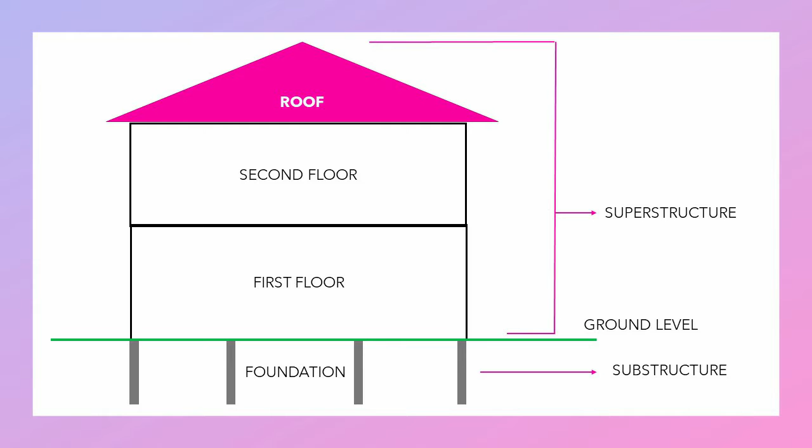Good day, students! Last sync meeting, natutunan natin kung anong importance and purpose ng foundation ng ating mga structures. Natutunan din natin kung paano gumawa ng foundation plan as part of our structural layout and details gamit ang AutoCAD.

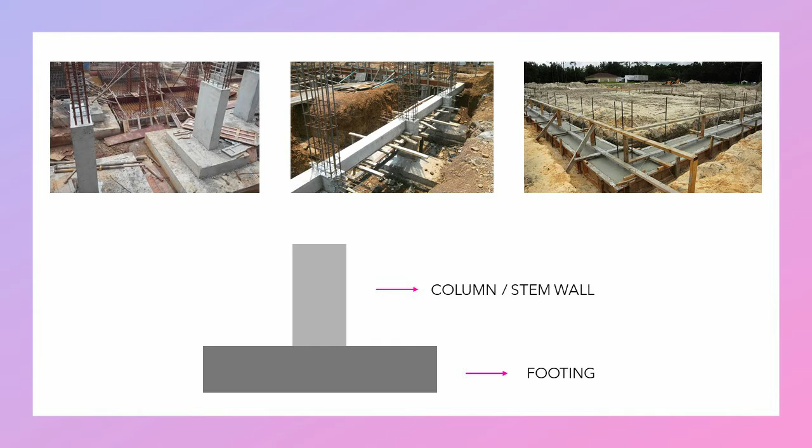Before we take a step ahead to part 2 of our structural layout and details, may additional feature lang akong gustong idagdag sa foundation plan natin. We will create grid lines based sa columns na ginawa natin. This is very important dahil dito magkakaroon ng label ang mga columns natin.

Okay, so we are here sa latest na ginawa natin, which is our foundation plan. We already designated our continuous footing and our columns as well. Now, para sa grid lines natin, let's use reference line layer and the reference bubble layer.

First, let's assign our reference lines. Using the line command, maglalagay tayo ng lines connecting the midpoints of our columns wherein dapat lahat ng columns natin ay magkakaroon ng intersection sa gitna. I-extend nyo lang yung reference lines nyo ng 2,000 mm outside the wall.

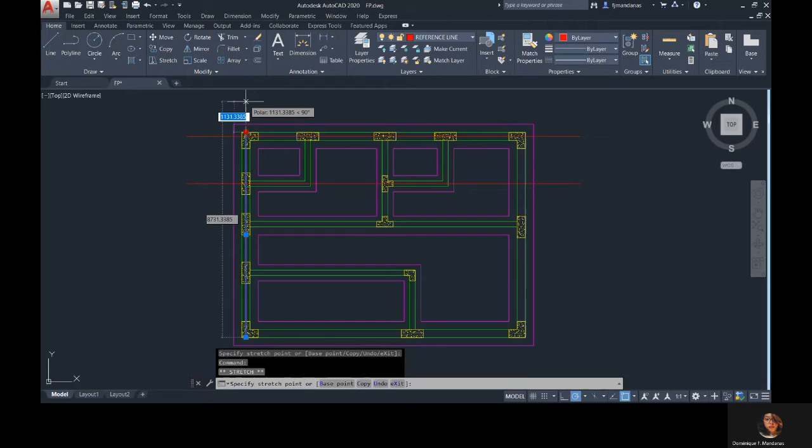This is a default, kaya kapag gagawa na rin kayo ng reference lines nyo, 2,000 mm din ang extension outside the exterior wall, specifically ang gagamitin nyo. You can repeat these steps lang then hanggang malagyan nyo lahat ng columns.

Or, we can use the X-line command. This is just an infinite line. Mas madali itong gamitin pag gumagawa tayo ng reference lines.

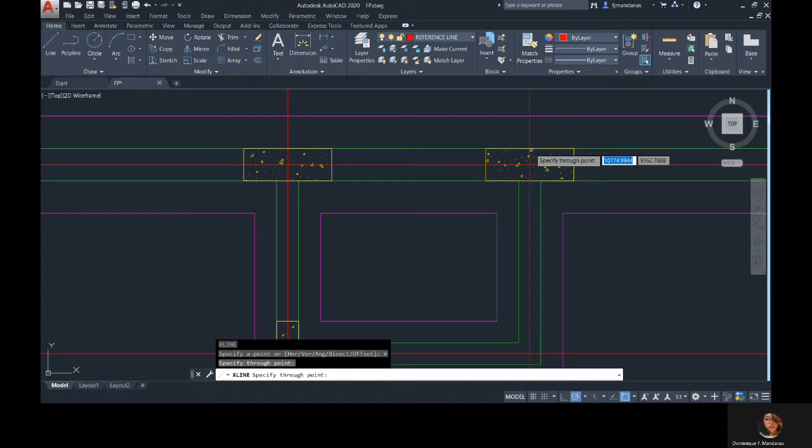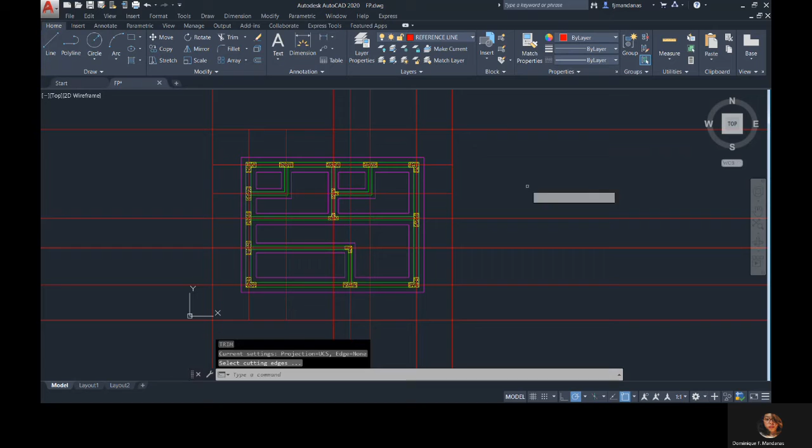And we can just use X-lines din na 2,000 mm ang distance from the wall, exterior wall, so that we can trim na lang yung mga sobra. Gawin nyo lang to all the columns, and then after that, don't forget to delete the extra X-lines we used for the trim command. Ayan, that is our reference lines.

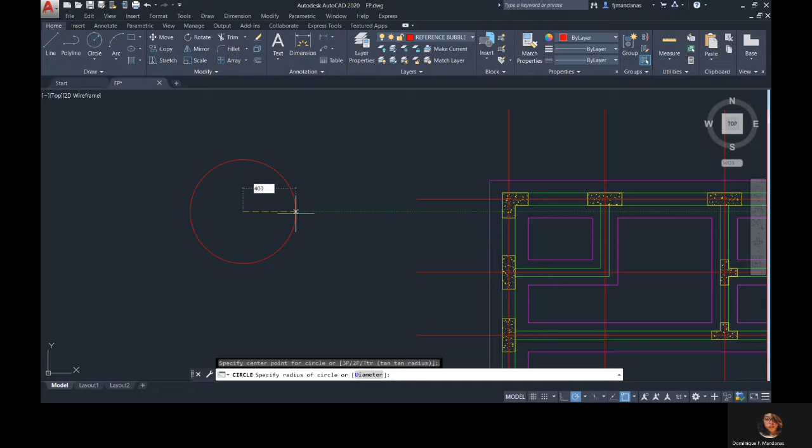Next, let's create the other part of our grid lines, which is the head. Punta tayo dito sa reference bubble layer. Gawa tayo ng circle with 400 mm na radius. After that, type T for the numbers and letters na ilalagay natin sa loob ng bubbles. Sa taas ay numbers and then sa left side naman are the letters. Gawin din nating 400 yung text height.

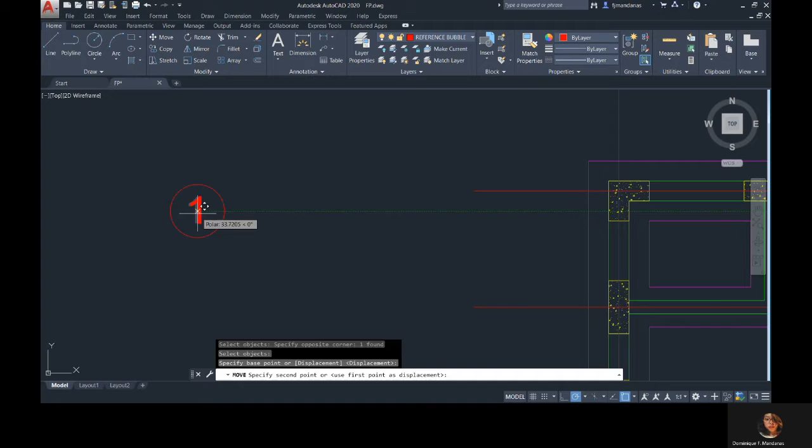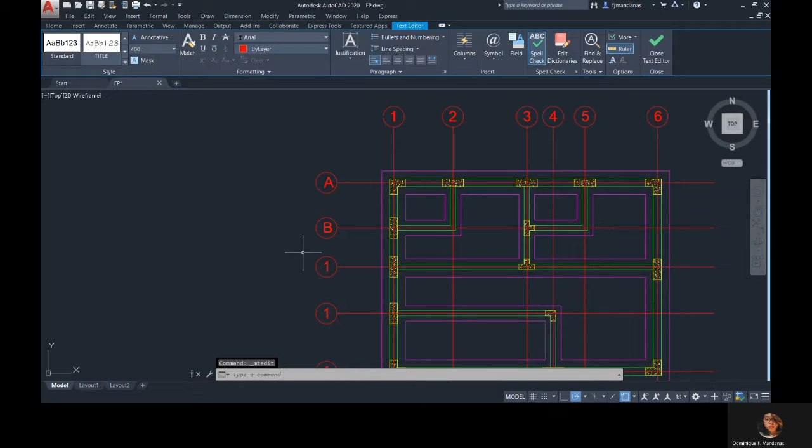After that, use the copy command para malagyan ng heads lahat ng reference lines sa top part and sa left. Make some necessary adjustments along the way, especially sa text sa loob ng ating mga bubbles. After that, we are really done sa ating foundation plan. As we can see, may mga pagkakakilanlan na ang ating mga columns like this one. This is the A1 column.

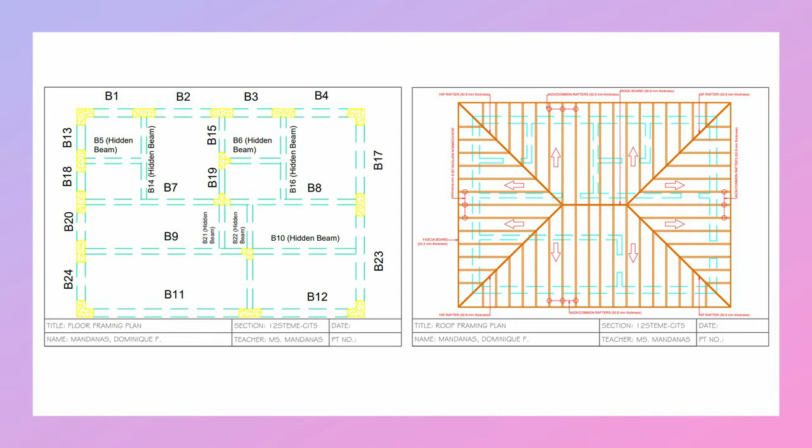Okay, so now we can proceed with part 2 of our structural layout and details, which are the floor framing plan and the roof framing plan. Let's start with the floor framing plan.

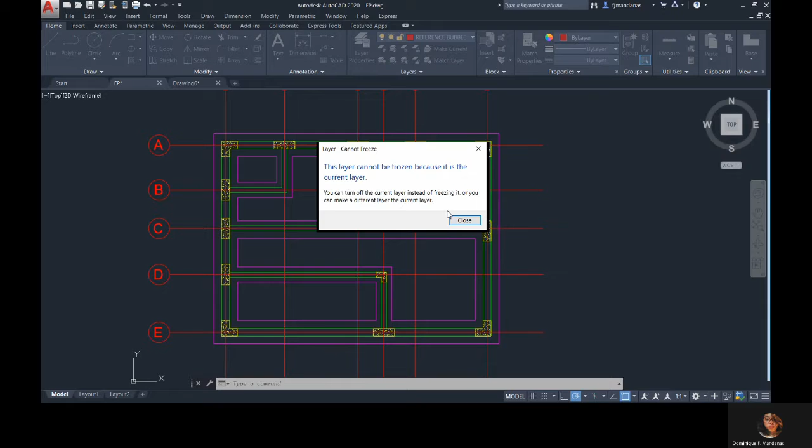Mag-open ako ng new file. Dito natin gagawin yung floor framing plan natin. Ano ba yung mga kailangan natin para dito? So for us to create floor framing plan, we specifically need our columns. Ibig sabihin, bago ka makapag-create ng floor framing plan, which is yung ganito, we have to create muna our foundation plan first. So, okay na tayo sa part na yon.

Let's copy the foundation plan na ginawa natin dito sa new file. After that, i-freeze natin yung lahat ng layers except sa layer ng column and yung hidden line layer which is yung reference ng wall natin na walang butas. Yun lang dalawang yun yung gagamitin natin. The rest ay dapat naka-freeze.

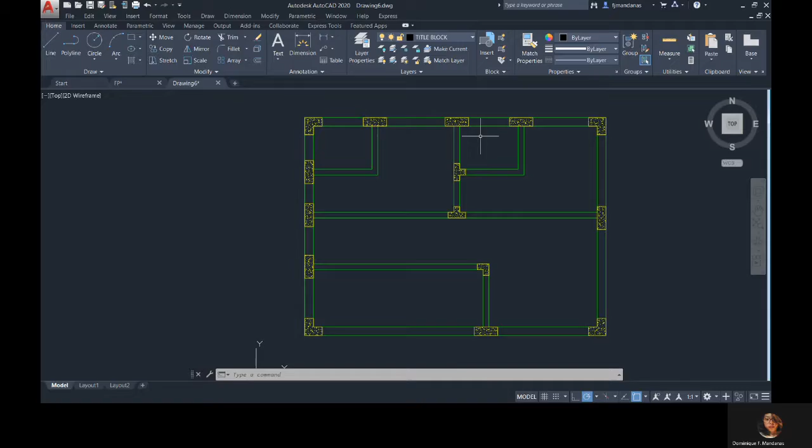So the composition of our floor framing plan is the beam. Beam is the direct support of the floor load of a building. It transfers this load to the adjacent columns. So with that definition, makikita na kaagad natin yung connection ng beam and columns.

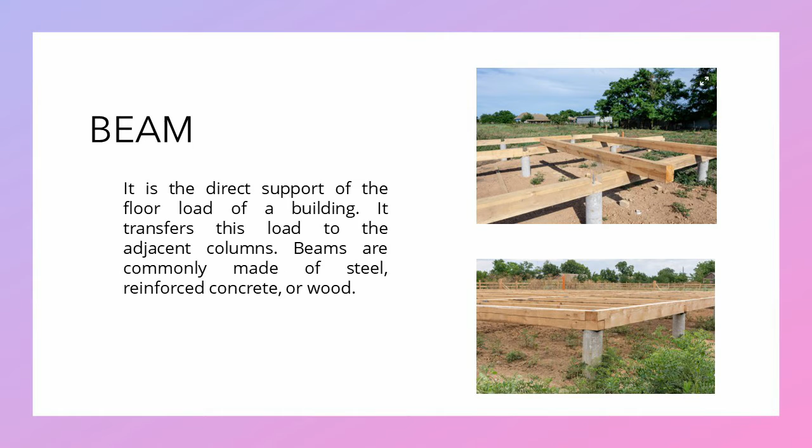On the right side, we can see ang ilan sa mga examples ng floor frame natin. So it has beams na connected sa mga columns na concrete. Putting our design in real life, ganito yung magiging itsura. Itong beams natin are gonna be the support of our flooring.

So, create tayo ng separate layer for the beam. Color is 112, line type, hidden 2 times, and line weight is 0.5 millimeters.

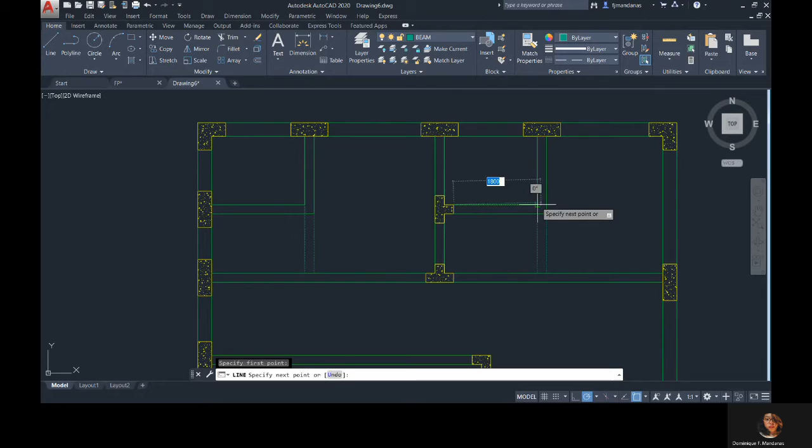Okay, after that, let's use line command to create our beams. We need to place our beams from column to column or from column to beam. If we encounter column to beam, we will call that a hidden beam. Lagay lang tayo ng beams natin sa mga parts na kailangan. No need to consider na yung mga dead loads natin dito since hindi naman ito ina-extend upward.

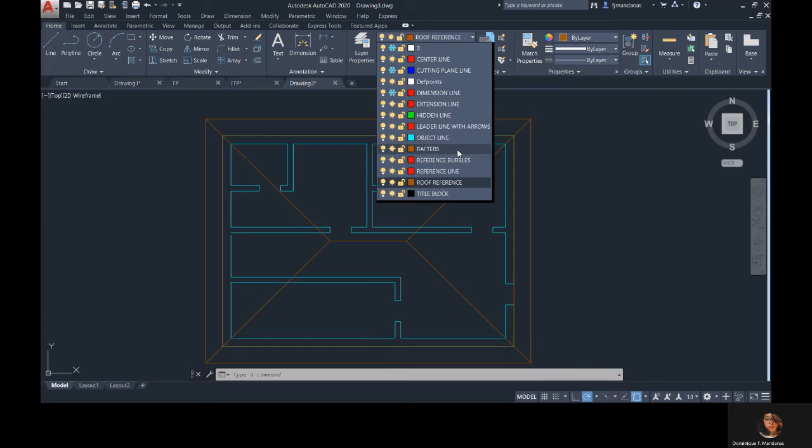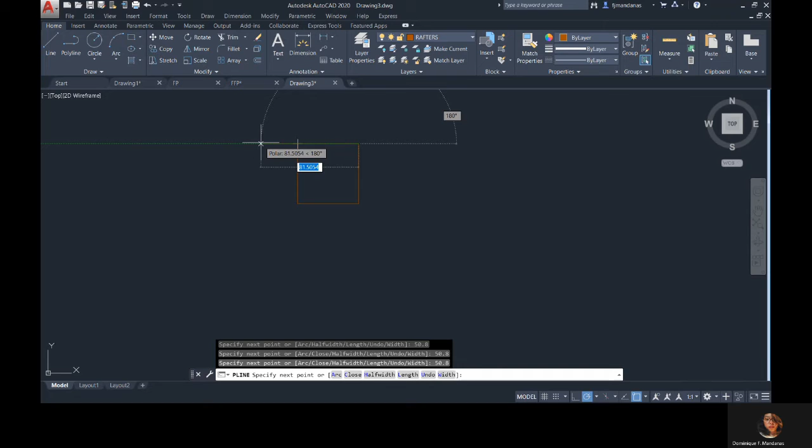Create tayo ng box gamit ang polyline command. Measurements natin ay 50.8 mm by 50.8 mm para sa rafters. Lagay tayo ng line sa gitna para mas madaling i-center yung box natin sa iba't ibang parts. I-delete din natin itong line after it served its purpose.

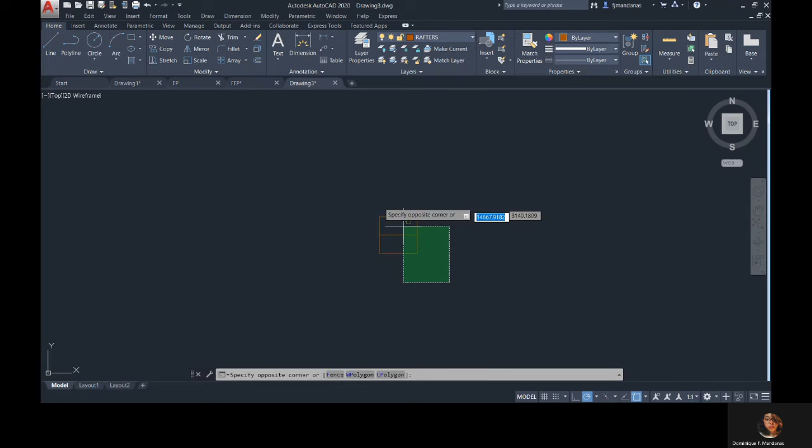Unahin natin yung ridge board. Let's copy itong box na ginawa natin. Midpoint ng line yung base point, tapos left click dito sa intersection. Extend mo yung box hanggang sa dulo ng ridge board reference line, then stretch for about 1 inch, or 25.4 millimeters. We are done sa ating ridge board.

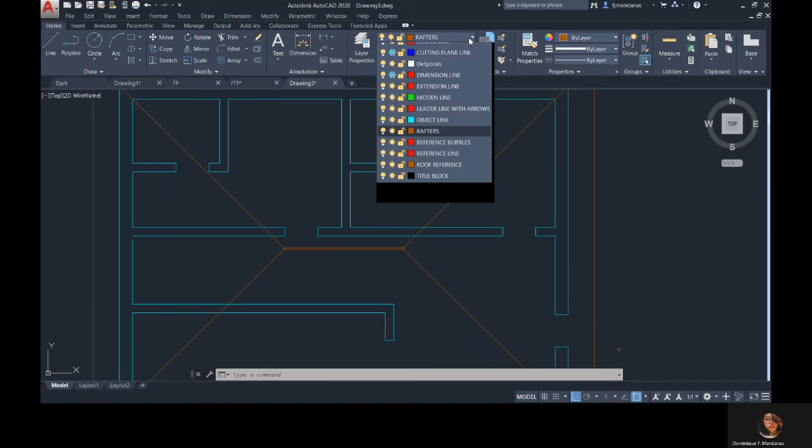Before we continue with the rafters, edit muna natin yung wall. Gawin nating hidden 2 times yung line type.

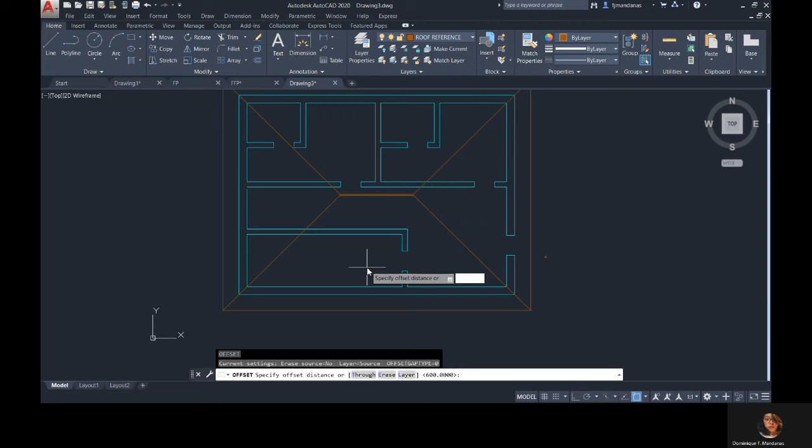Okay, let's create our fascia board gamit ang offset command. Offset the outer layer with an offset distance of 25.4 millimeters, and ang offset ay paloob towards the wall ang direction. Fascia board is done. Pagkatapos nun, gawin naman natin yung first hip rafters natin.

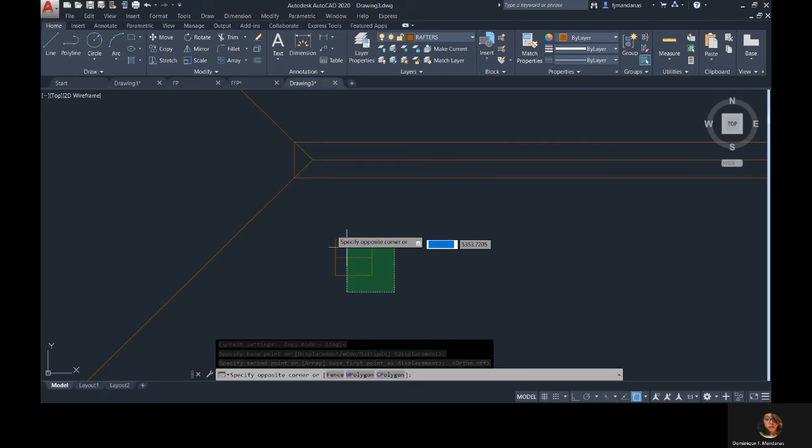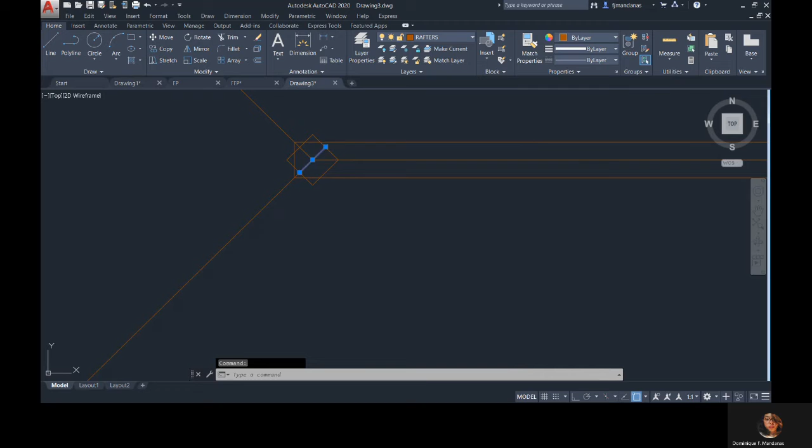Gamit yung box na ginawa natin kanina, i-copy mo yon, then rotate for about 45 degrees. Move it to the endpoint of the hip rafters over here. After that, extend mo yung box all the way here. Wag dito sa outer rectangle ha.

Dito sa offset for fascia board yung dulo. So that is our first hip rafters.

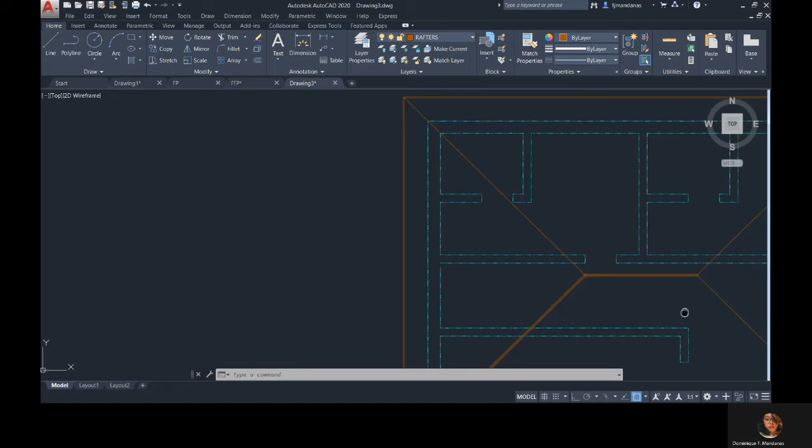Let's copy yung ginawa natin na box to create naman yung first common rafter natin. Move it dito sa dulo ng ridge board. Then extend hanggang dito sa fascia board. You can use ortho mode para talagang pantay yung extension.

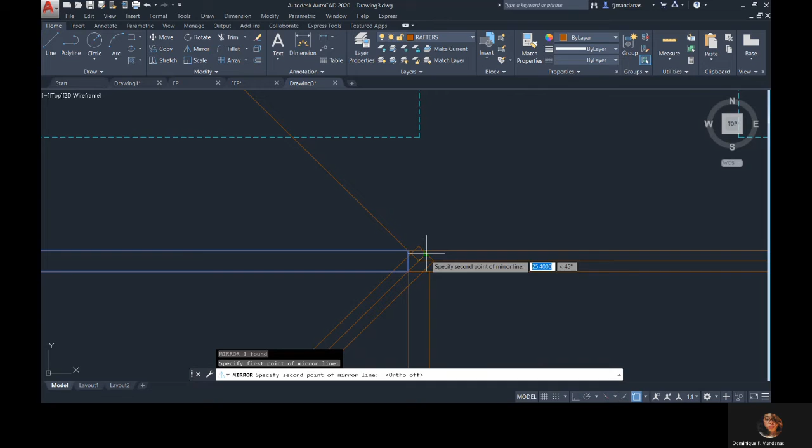I-mirror lang natin itong common rafter na ito dito sa baba. Let's modify itong hip rafter natin.

Tapat mo lang yung mouse mo dito. Then click Add Vertex, move the middle dito sa dulo na ito. Then stretch lang yung mga dulo doon sa intersection o snap sa common rafters. Ayan, we created the tip of our hip rafter. Do the same step sa kabilang dulo ng hip rafter.

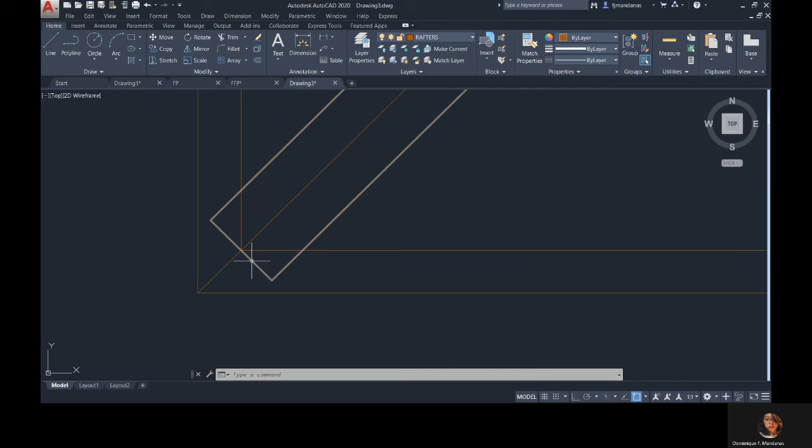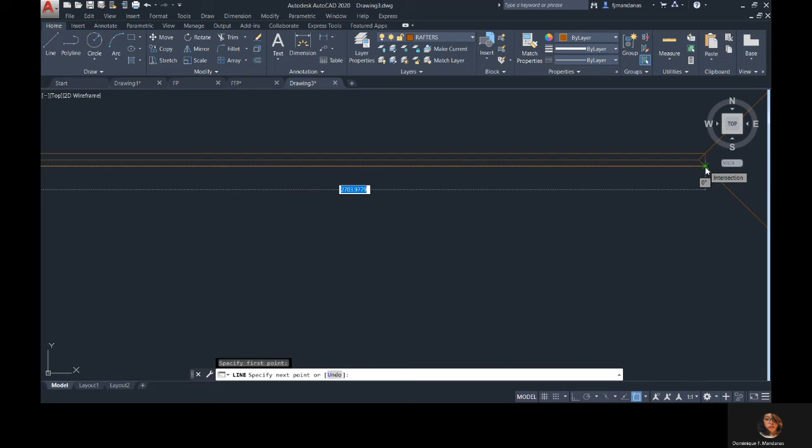After that, let's create the other common and jack rafters. Distance ng common and jack rafters natin, as we said earlier, is 20 inches or 508 millimeters. So let's create a reference line right here with 508 millimeters length.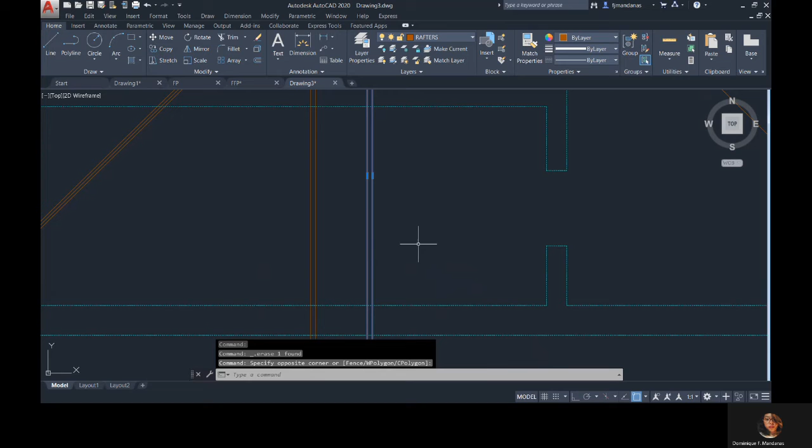Copy natin itong rafters na ito sa endpoint ng line na ginawa natin. Don't forget to delete that line after it served its purpose. Gawa pa tayo ng isa, same step lang din.

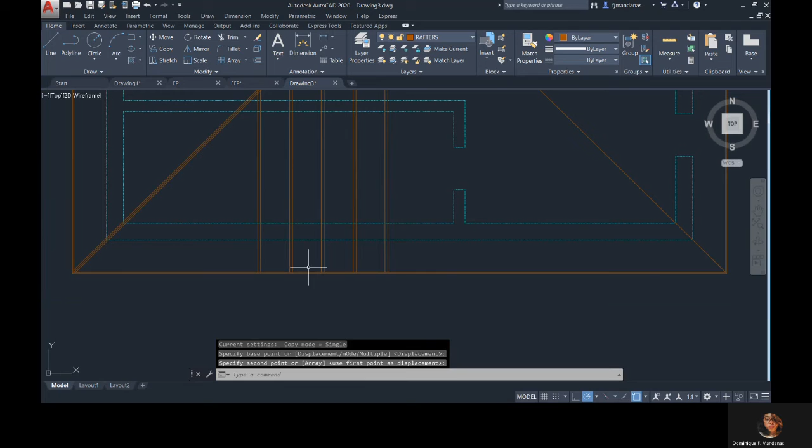After that, copy these two common rafters, at ang base point ay itong pangatlo. Then move it right here. Ulitin lang yung ganitong pag-copy hanggang sa dulo.

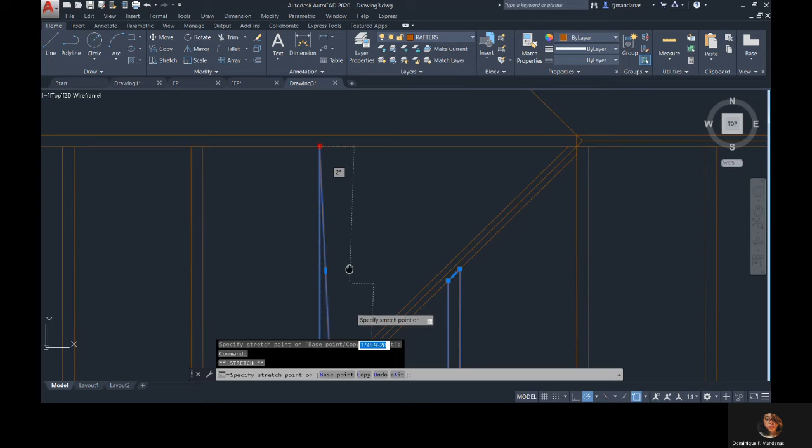Then itong mga nag-overlap sa hip rafter natin, stretch lang natin yung corners nila up to the intersection o snap sa hip rafter. Repeat the same steps to the remaining common rafters na nag-overlap sa hip rafters natin.

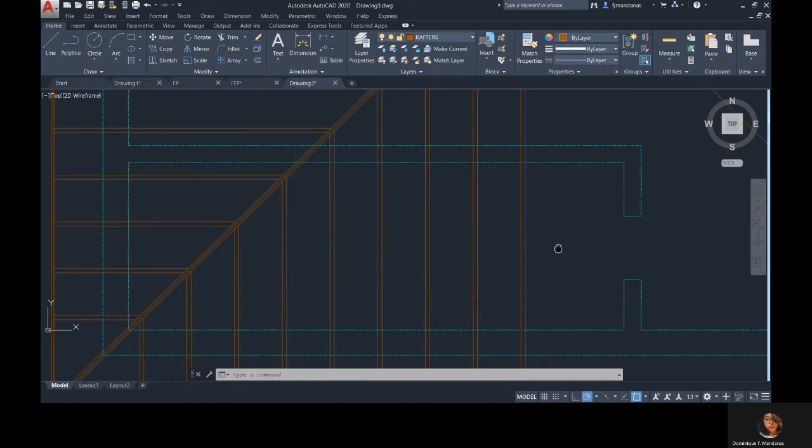After that, let's use mirror command para makreate yung jack rafters natin sa kabilang side sa taas. Let's mirror all of the rafters we've created dito naman sa right side. Make sure nakasama yung hip rafters. Then itong lahat naman ng ito, i-mirror natin upward.

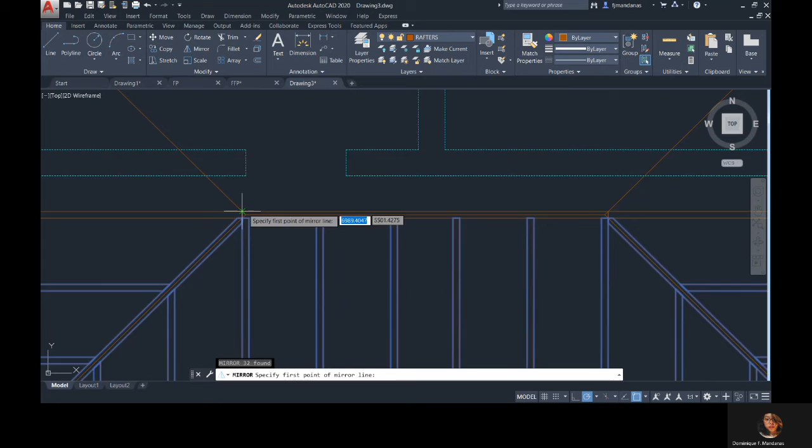We are done with the roof frames. Mag-add lang tayo ng mga labels. Let's use the leader line with arrows layer for the labels of the parts of our hip roof.

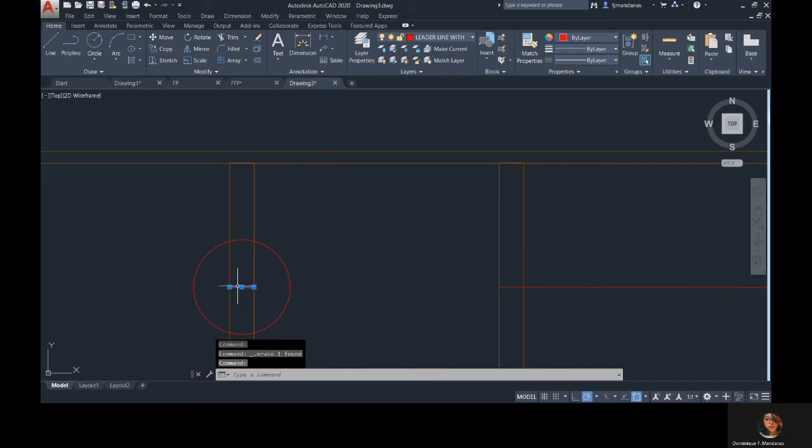Create tayo ng circle dito with 100 mm diameter, covering 3 jack and/or common rafters. Then connect the center of the first circle to the center of the third using line. Click on this leader line arrow, then type the label and the thickness of the jack and common rafters.

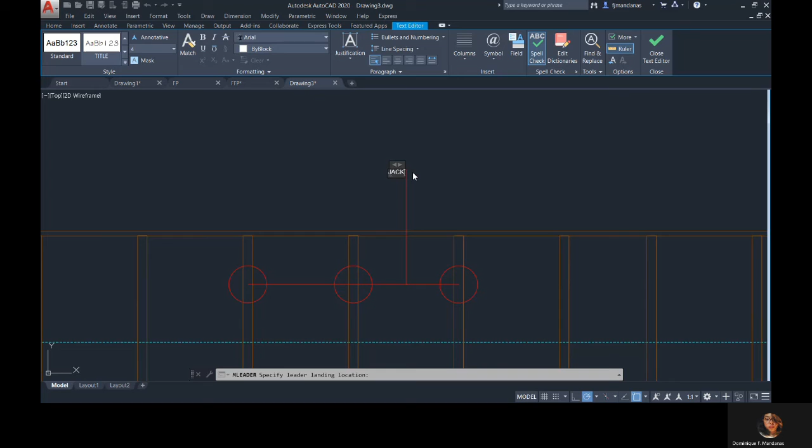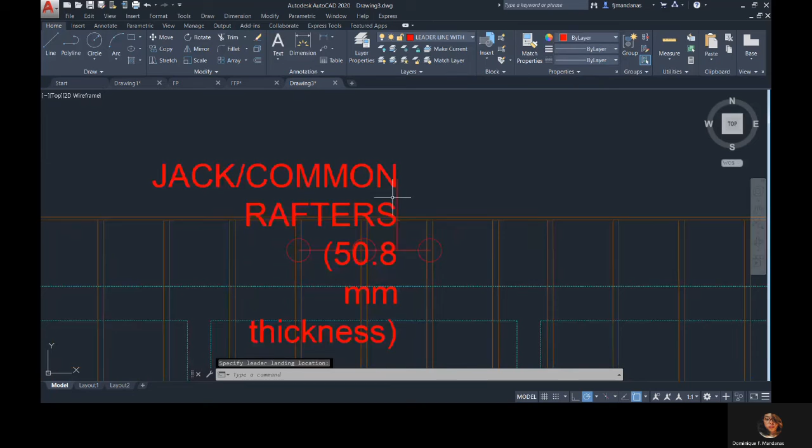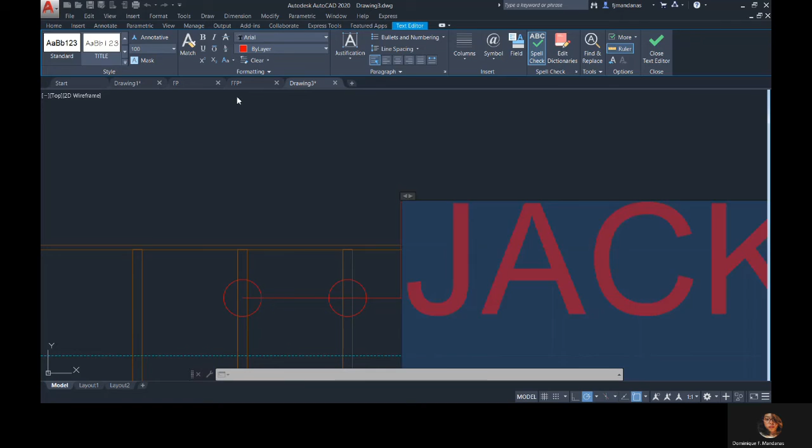Standard, text height of 100, arrowhead size is 100 din. So kung wala kayong choice dito sa arrowhead size, you can click this and check yung arrowhead size checkbox, so mag-a-appear na siya doon after nyong i-apply.

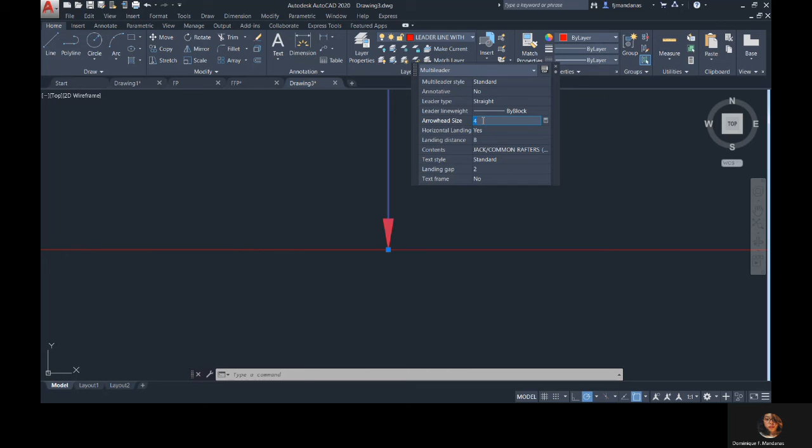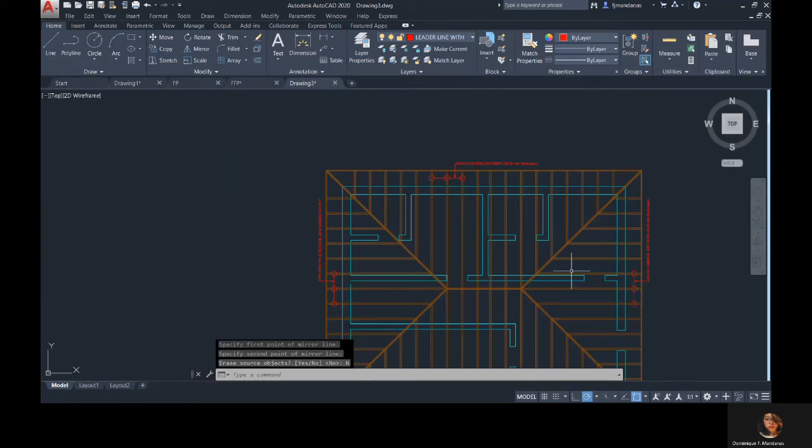And then after that, mirror lang lahat ng ito sa baba and sa dalawang gilid. After that, use leader line arrows then for the other parts. Then again, type the label and the thickness of the parts. Use the mirror command if necessary.

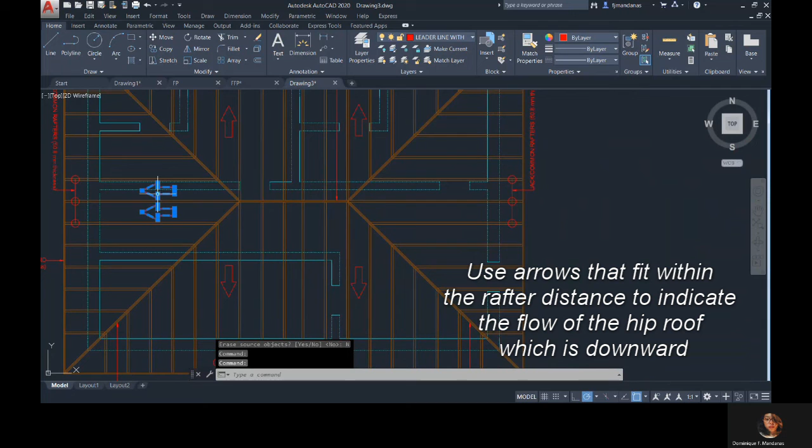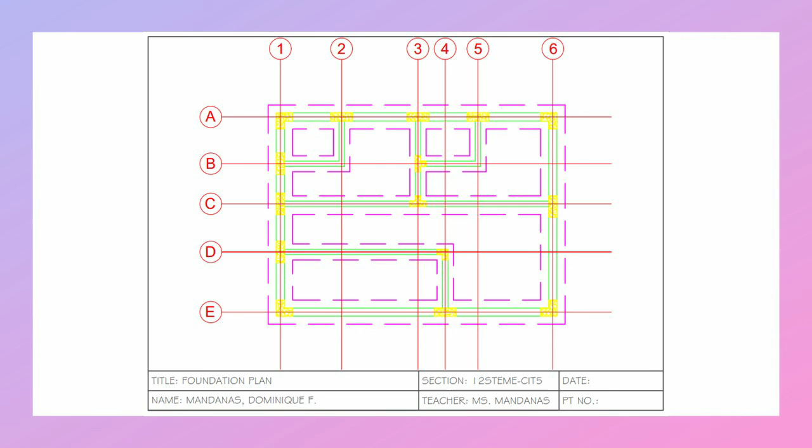So, ito na. This is our final roof framing plan. Today, we modified our foundation plan. We added a feature, which is the grid line, and most especially, we learned how to create floor framing plan and roof framing plan. So that is it for our Module 11. See you on the next and the last one.